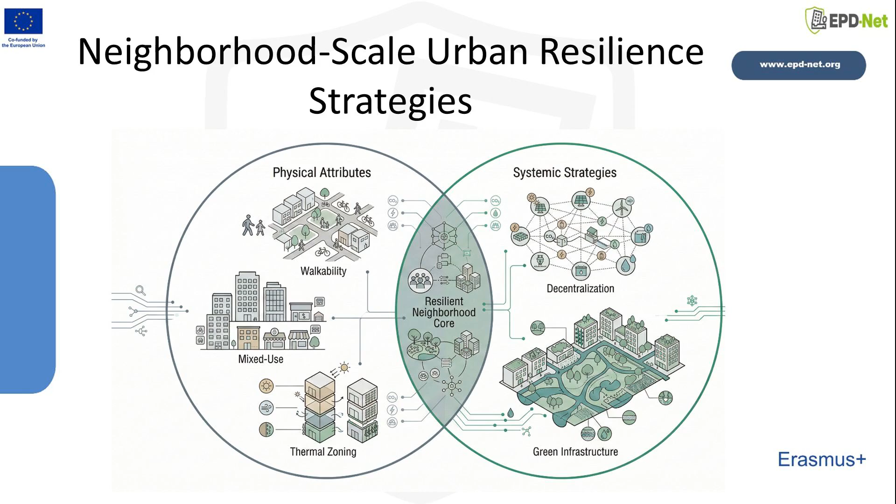Consequently, a multidimensional socio-technical framework is proposed. Within this framework, the integration of physical attributes, such as walkability, mixed use, and thermal zoning, with systemic strategies like decentralization and integrated green infrastructure is examined. The fundamental objective of this presentation is to outline how the neighborhood unit serves as the essential building block for fostering a resilient urban future through the synthesis of spatial morphology and social agency.

Urban resilience is built upon a multifaceted framework that begins with a robust theoretical understanding of the concept of resilience and the strategic mesoscale advantage of the neighborhood unit. By viewing neighborhoods as complex adaptive systems, practitioners can implement the principle of decentralization and optimize street network topology to ensure structural robustness. Within this spatial fabric, walkability serves as a primary resilience strategy and a critical survival mechanism, while the emergent neighborhood model and mixed-use development foster functional redundancy and social cohesion.

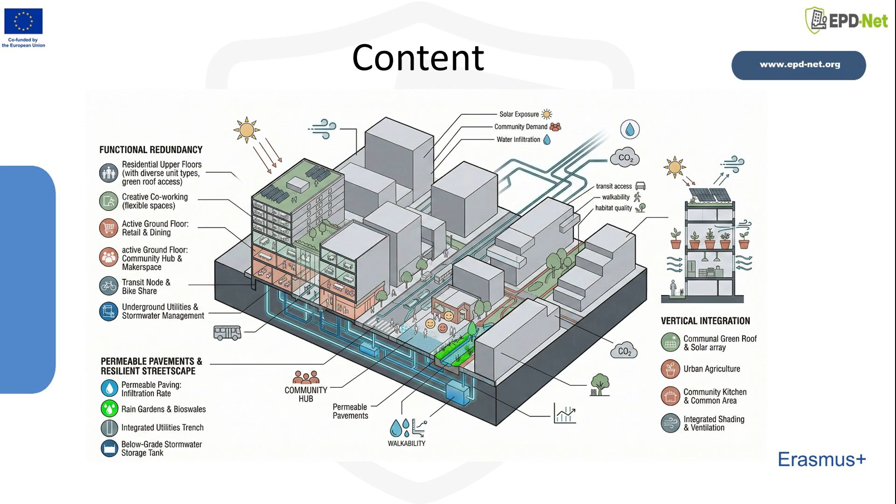Environmental stability is further enhanced through thermal zoning, climate sensitivity measures, and the pursuit of passive survivability. These physical attributes are integrated with nature-based solutions like integrated green infrastructure and technical systems such as decentralized energy production to create resource autonomy. Finally, this technical hardware is activated by the social hardware of community hubs and supported by transformational governance and tactical urbanism, leading to a comprehensive synthesis of actionable takeaways and conclusions for a resilient urban future.

For resilience to be effectively operationalized, it must be defined with academic precision. Within the seminal framework which poses the normative questions, resilience for whom, what, when, where, and why, it is recognized that resilience is not a value-neutral technical objective but is deeply rooted in political and social contexts. A system is not considered truly resilient if its physical robustness is achieved at the expense of social equity.

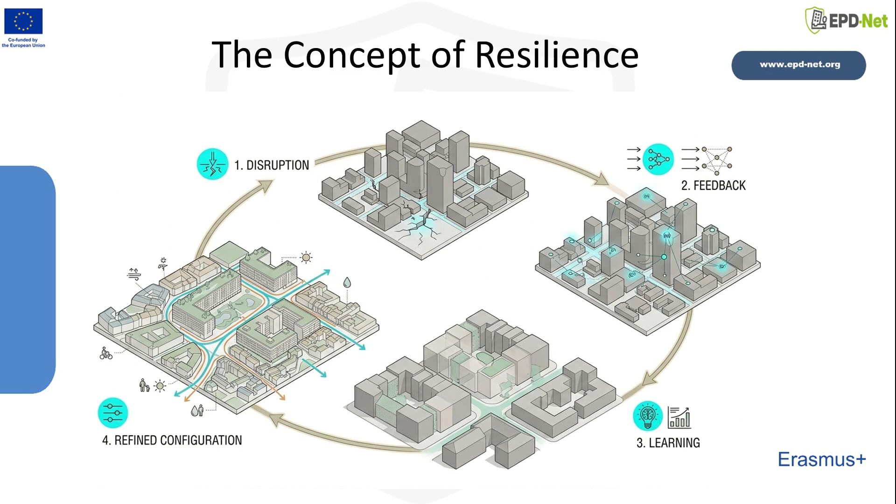Therefore, a balance must be struck between robustness, the physical durability of the built environment, and resourcefulness, the capacity of a community to mobilize assets under pressure. Resilience is viewed as an iterative process of constant learning, where every disruption serves as a feedback loop to refine subsequent urban configurations. The ultimate goal is the cultivation of a capacity to adapt and transform amidst pervasive uncertainty.

The neighborhood can be identified as the critical mesoscale of urban intervention. It is observed that macro-level citywide strategies often suffer from abstraction and fail to address localized microclimates or specific socio-economic requirements. Conversely, building-scale interventions are often too fragmented to ensure systemic stability. The neighborhood scale is identified as the optimal level for the integration of technical systems, such as microgrids or localized water management, while simultaneously fostering social cohesion.

At this scale, urban form, including parameters like building heights, street widths, and the distribution of open spaces, is seen to directly dictate the daily operational capacity and survival potential of the inhabitants. By decentralizing resilience strategies to the neighborhood level, a modular urban fabric is created, which is inherently more robust than a system reliant on a singular, centralized core.

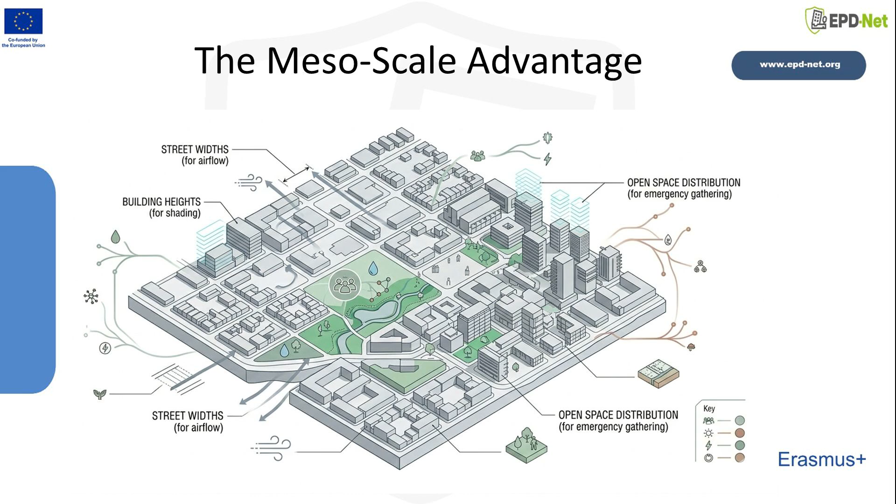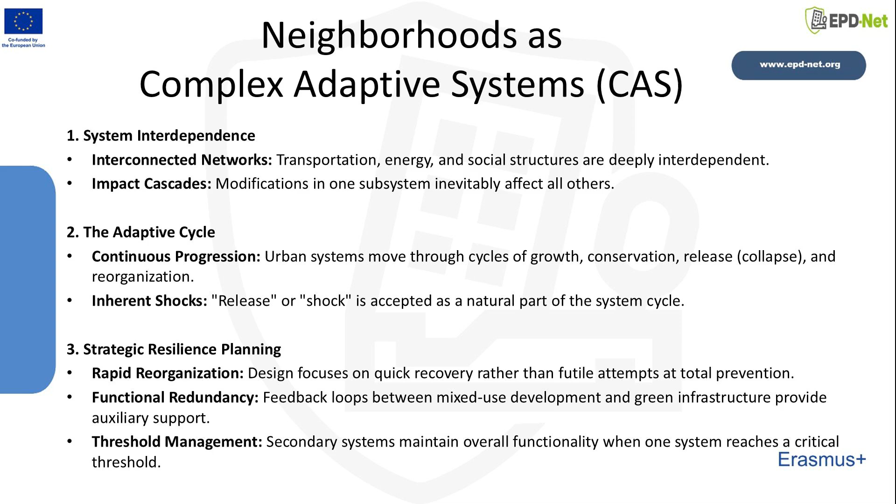Neighborhoods are conceptualized as complex adaptive systems, wherein transportation networks, energy grids, and social structures are deeply interdependent. It is understood that a modification in one subsystem inevitably impacts the others. Within this adaptive framework, urban systems are observed to progress through continuous cycles of growth, conservation, release, and reorganization. Resilience planning is based on the acceptance that release, or shock, is an inherent part of the system cycle. Instead of futile attempts at total prevention, neighborhoods are designed to facilitate rapid reorganization.

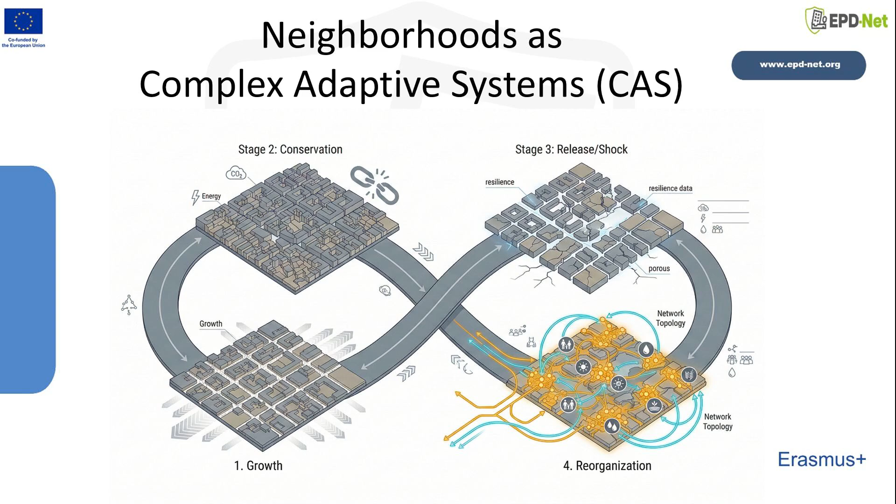By analyzing the feedback loops between mixed-use development and integrated green infrastructure, it is ensured that when one system reaches a critical threshold, auxiliary systems provide the necessary support to maintain overall functionality.

Centralization is identified as a primary vulnerability in modern urban configurations. Dependence on distant, singular power plants or massive water mains creates a high risk of cascading failures. Decentralization is advocated as a strategic defense mechanism.

By decomposing the urban environment into semi-autonomous neighborhood modules, the propagation of disruptions is effectively contained. The objective for a resilient neighborhood is the attainment of resource autonomy, achieved through decentralized energy production and localized water and waste management.

While the neighborhood remains connected to the macro city, it is equipped with islanding capacity, allowing for independent operation during macro grid failures. This modularity is a fundamental requirement for systemic robustness against contemporary environmental and technical threats. The street network is the structural backbone of the neighborhood.

The topology, or geometric arrangement of this network, is a primary determinant of its robustness. A comparison is made between highly connected grid networks and hierarchical, tree-like structures. The grid is characterized by inherent redundancy, providing multiple alternative paths if primary intersections are compromised. In contrast, hierarchical models are susceptible to isolation if a singular arterial road is blocked.

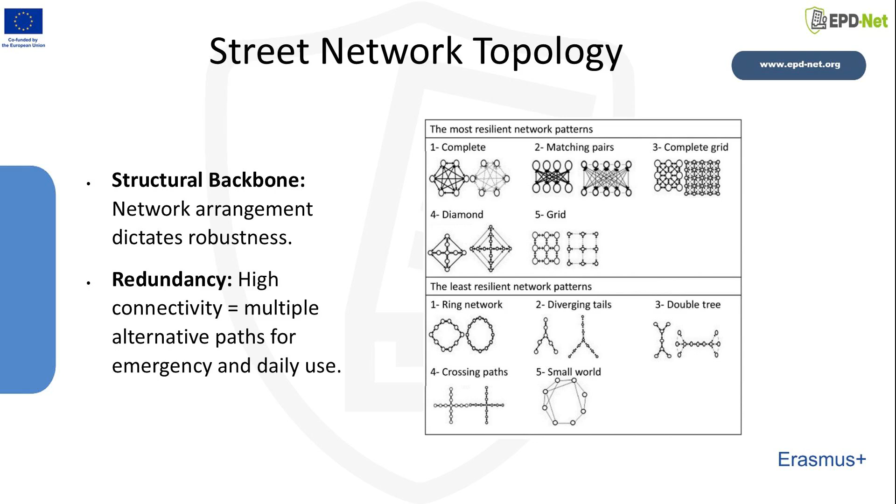By utilizing computational tools such as OSMnx, a Python library that allows users to download, model, analyze, and visualize street networks and other geospatial data from OpenStreetMap, these connectivity patterns are quantified. A resilient neighborhood must prioritize a porous, fine-grained street network, ensuring the continuous flow of residents and essential resources even when primary transportation routes are obstructed.

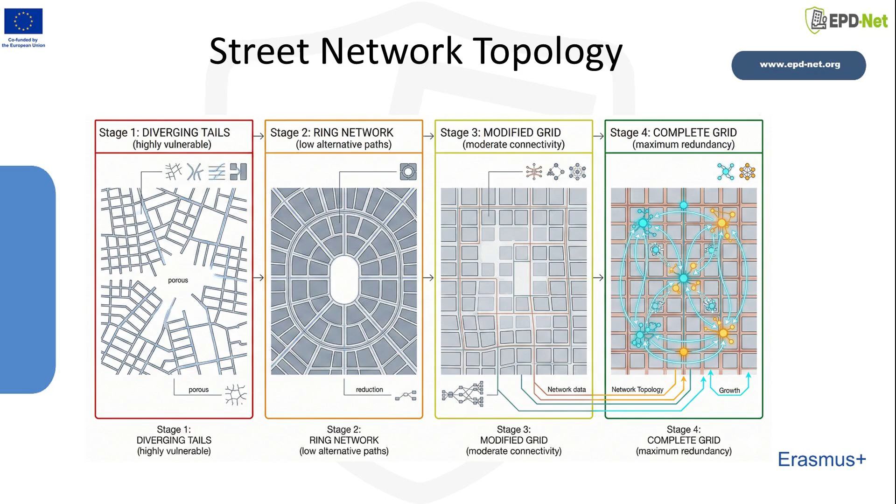Walkability is a primary redundant transport mode. In scenarios involving fuel shortages, cyber attacks on automated transit, or structural damage to road surfaces, the capacity for pedestrian movement determines the continuous accessibility of life-sustaining services.

Walkability is no longer a luxury but a fundamental necessity for the resilient city, providing a fail-safe mobility option when high-tech infrastructure collapses. A resilient neighborhood is one where essential resources and community hubs are situated within a 5 to 15-minute walking radius. This requires high intersection density and shaded, safe pedestrian corridors, a structural requirement that can be rigorously quantified through computational tools such as OSMnx to ensure a porous and fine-grained network topology.

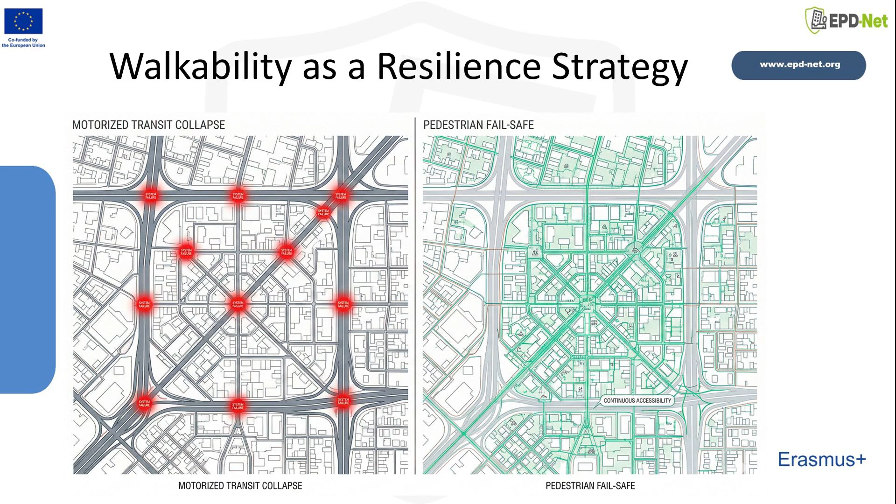Furthermore, the geometric configuration of walkable urban forms reduces the neighborhood's sensitivity to external transportation shocks. By decoupling survival needs from motorized transit through a robust pedestrian-oriented morphology, the neighborhood achieves a higher degree of self-sufficiency and functional continuity during the initial stages of a crisis.

The spatial formation of walkable networks is fundamentally defined through the emergent neighborhood model, described as a departure from static, administrative zoning toward a dynamic, living system approach. This model posits that neighborhoods are not merely administrative constructs but emerge from the underlying geometry of street networks.

When street networks are designed with high betweenness centrality, social and commercial centers are naturally fostered at the most connected nodes. This spontaneous order is regarded as more resilient than rigid, top-down master planning because it aligns physical form with actual human behavior and the human measure of urban life.

The model shares a lineage with the traditional neighborhood unit, particularly in the emphasis on pedestrian safety and the creation of sanctuary areas protected from heavy through traffic. However, where the historical model was criticized for being an isolated, inward-looking cell with clear boundaries, the emergent neighborhood model proposes a more permeable and overlapping structure.

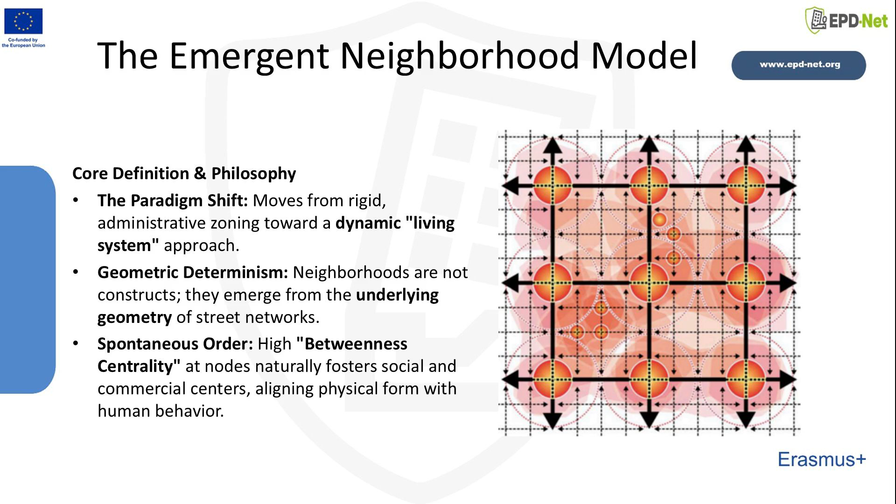Similarly, the model aligns with transit-oriented development, TOD, by prioritizing walkability and ecological community structures. However, the emergent neighborhood model seeks to evolve beyond the TOD paradigm, which can present health risks due to high-volume concentration. Instead of just maximizing density, it focuses on optimizing network capacity and territorial displacements.

It functions as a glocal entity, combining local place identity with access to the global world through mobility and digital infrastructures. It suggests that if the geometry and digital upgrading are correct, functional diversity and social capital will follow as a natural byproduct. Ultimately, by adhering to these geometric laws of connectivity and integrating micromobility solutions, a spatial order is created that reinforces the neighborhood's capacity for self-organization during disturbances.

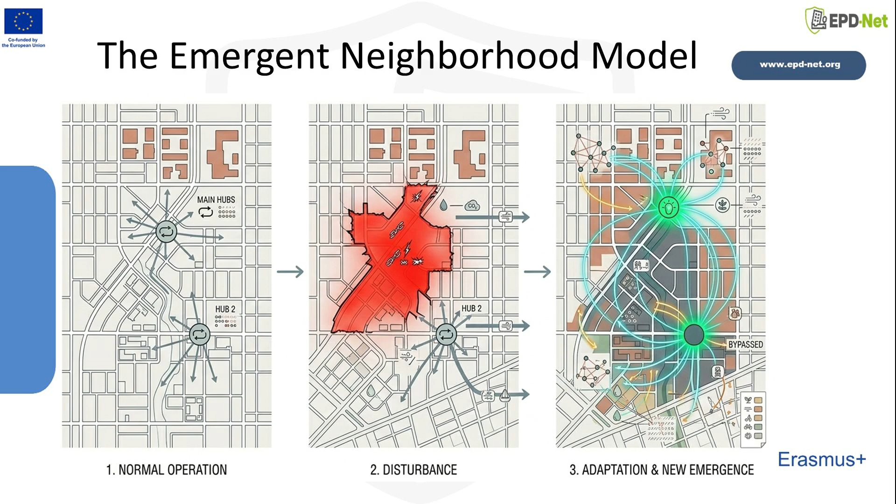Unlike rigid mid-20th century planning, this approach fosters a resilient urban fabric that can adapt to socio-economic shifts and unforeseen events. By incorporating zero-minute trips through digital accessibility and remote working flexibility, the neighborhood remains a dynamic, sustainable, and inclusive participant in the life of the city rather than a static artifact.

Mixed-use development is presented as the primary driver of functional diversity within the urban fabric. Purely residential zones are characterized as dormitories of vulnerability, lacking the localized resources necessary for crisis management. Conversely, mixed-use neighborhoods, integrating residential, commercial, and light industrial functions, possess functional redundancy. Local commercial spaces are identified as potential distribution points, and office environments are seen as adaptable for emergency use.

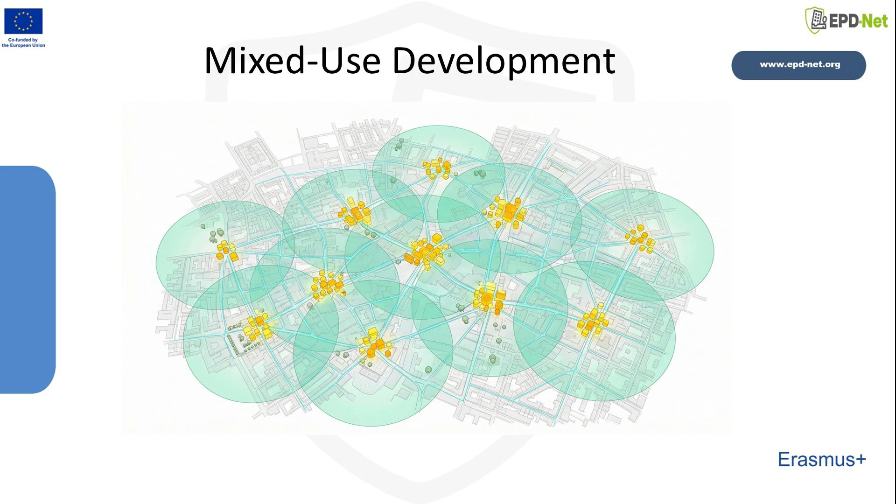This diversity ensures that the 15-minute city concept functions as a robust safety net. By localizing the economy and essential services, the circuity of movement is decreased, and the resourcefulness of the community is increased. The synergy between functional variety and spatial form is seen to significantly bolster the neighborhood's adaptive capacity.

The escalation of global temperatures necessitates that neighborhoods be designed to mitigate the urban heat island effect. This is addressed through the application of thermal zoning, which involves the strategic manipulation of urban morphology to influence the local microclimate. Through the variation of building heights to facilitate mutual shading, and the alignment of streets to serve as ventilation corridors, ambient temperatures are effectively lowered.

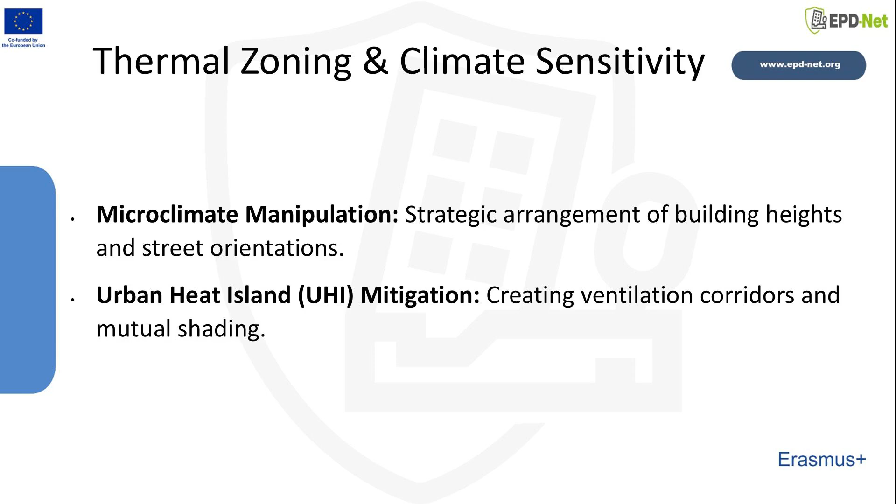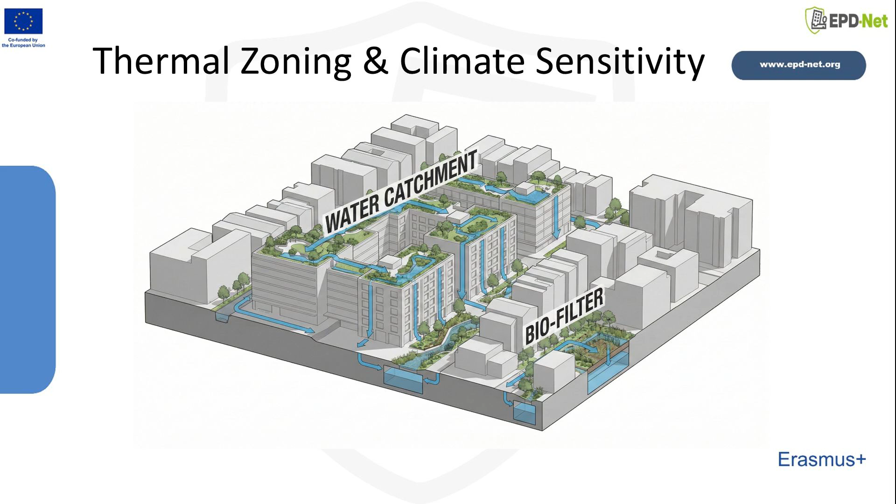It is defined as the capacity of the built environment to maintain habitable conditions, specifically safe internal temperatures and air quality, during extended disruptions to the electrical grid.

In a resilient neighborhood, reliance on mechanical air conditioning is minimized through the use of porous morphology. This involves the design of buildings and urban blocks that facilitate natural cross-ventilation and utilize thermal mass for temperature regulation. Fine-grained urban forms are often superior in this regard compared to massive, coarse-grained superblocks.

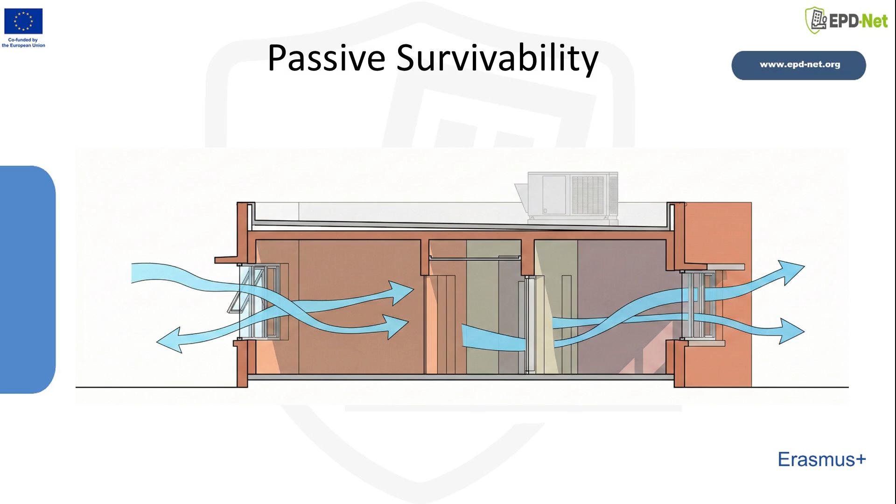Passive survivability is presented as a life-saving feature, particularly for vulnerable populations, ensuring that the neighborhood remains a safe environment even when active technical systems are incapacitated.

The green hardware of the neighborhood is explored through integrated green infrastructure. It is observed that traditional gray infrastructure is often characterized by brittle failure when its fixed capacity is exceeded. IGI, comprising bioswales, rain gardens, and permeable pavements, follows a safe-to-fail logic.

Stormwater is managed at the source through localized absorption, thereby reducing the hydraulic pressure on municipal sewers and mitigating flood risks.

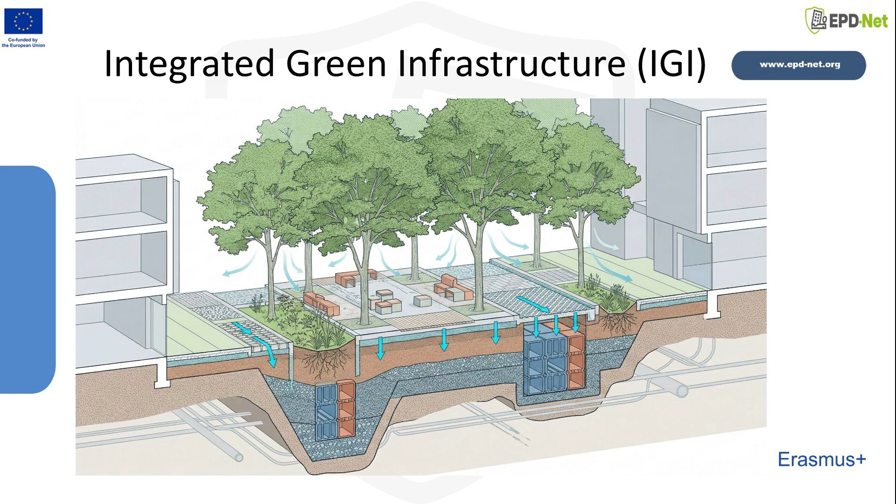Furthermore, IGI is seen to provide ecological redundancy by contributing to local cooling and air purification. By integrating these nature-based solutions into the existing street network, a sponge neighborhood is created, utilizing ecosystem services to buffer the community against environmental shocks and enhancing the overall microclimatic stability.

The traditional dependence of modern neighborhoods on a centralized electricity grid is increasingly identified as a significant systemic vulnerability, particularly in the face of climate-induced disruptions and infrastructure aging.

To mitigate these risks, decentralized energy systems, which incorporate neighborhood-scale renewable generation and localized storage, are proposed to transform the passive residential cluster into an active prosumer. By generating and managing their own power, these mesoscale units transition from being mere consumers to integral components of a distributed energy architecture. A primary technical advantage of this transition is the islanding capability of microgrids.

This capability allows a neighborhood to disconnect from the macrogrid to maintain critical local power during wider outages. In the event of a macrogrid failure, the neighborhood microgrid is capable of independent operation, ensuring the continued functionality of essential services, such as community hubs, water pumping stations, and medical facilities. Such resource autonomy, supported by neighborhood solar arrays, wind, and microgrids, is seen as critical for systemic robustness.

Beyond technical reliability, the transition encompasses vital social dimensions and promotes equity. Community-led energy cooperatives have been found to reduce energy poverty by democratizing access to low-cost renewables and fostering localized economic strength. By keeping energy expenditures within the community and creating local green jobs, these systems contribute to the long-term socio-economic resilience of the mesoscale.

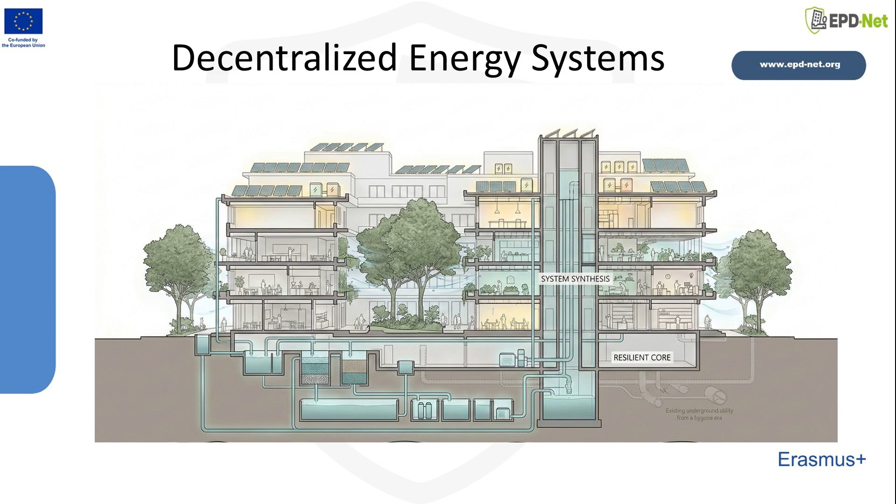This shift essentially redefines energy as a common good, where local governance of resources leads to a more sustainable, equitable, and disaster-resilient urban fabric. While technical infrastructure is essential, social capital is maintained as the primary driver of recovery. Community hubs, including urban amenities such as libraries, plazas, and schools, are conceptualized as the social hardware of resilience. These spaces are where bonding and bridging social networks are cultivated.

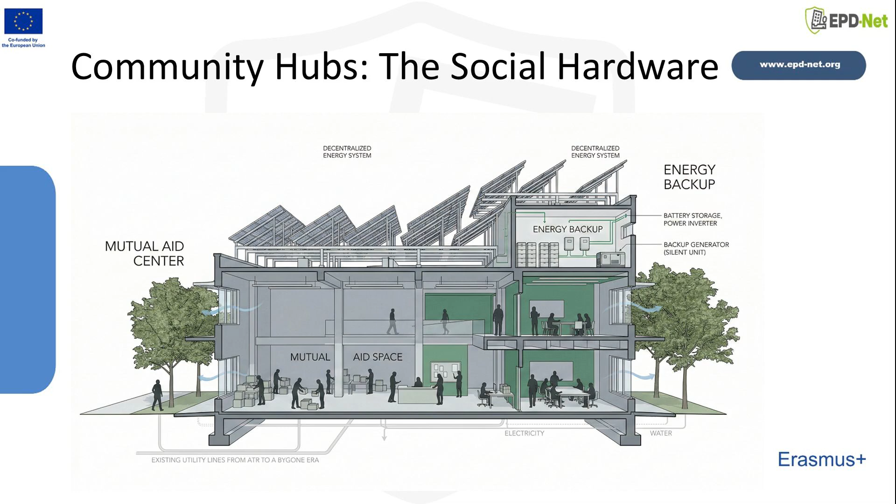During disturbances, these hubs are activated as centers for information exchange and mutual aid. Communities characterized by high levels of trust and social cohesion exhibit significantly faster recovery rates. The design of a resilient neighborhood must ensure these hubs are physically robust, equipped with decentralized energy backups, and situated at the most accessible, walkable nodes within the street network to ensure their utility for the entire population during crises.

The management of complex, decentralized urban systems is argued to require transformational governance. Traditional, top-down planning models are often too rigid for the dynamic nature of urban resilience. Instead, an adaptive, bottom-up approach is advocated, characterized by learning by doing. The utilization of situated knowledge, the localized expertise of residents, is emphasized to identify vulnerabilities that may be overlooked by macro-scale analysis.

Resilient governance is defined by its inclusivity, ensuring that residents are active participants in the management of their integrated green infrastructure and decentralized energy systems. By fostering collective ownership and agency, it is ensured that resilience strategies are both technically robust and socially sustainable, thereby strengthening the neighborhood's long-term adaptive capacity.

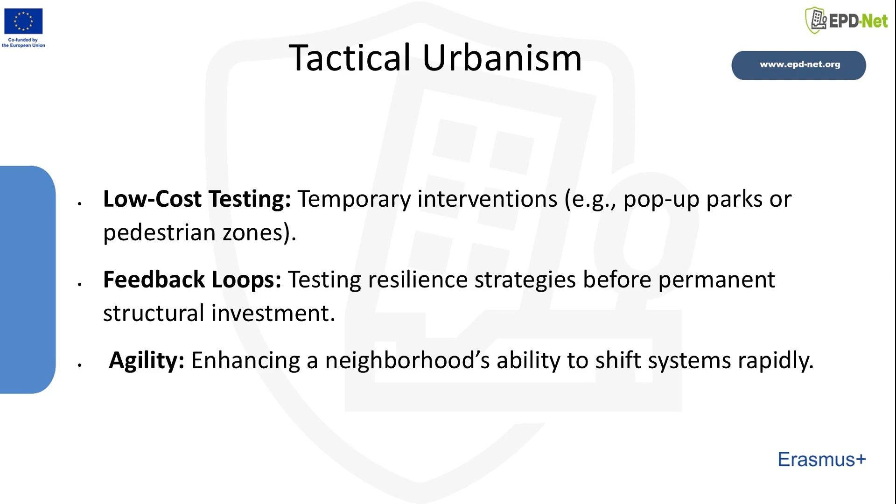Tactical urbanism is presented as a primary mechanism for the implementation of adaptive governance. These are defined as low-cost, temporary physical interventions, such as pop-up parks or temporary pedestrian zones, that facilitate the real-time testing of resilience strategies. By utilizing these methods, the performance of specific urban configurations, such as cooling corridors, can be measured before permanent structural investments are made.

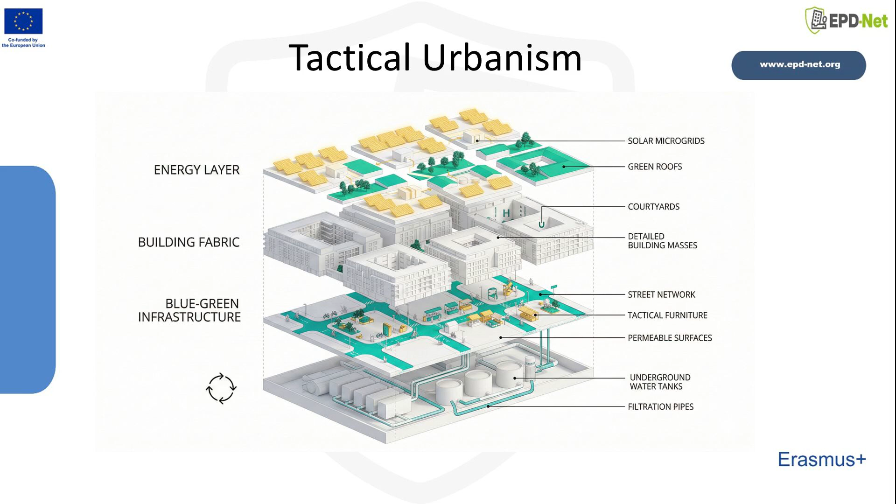This process creates a feedback loop that allows the neighborhood to evolve incrementally and adaptively. Tactical urbanism reduces the risk of costly, permanent errors and empowers the community to participate directly in the morphological evolution of their environment. This agility is identified as a necessary trait for any complex adaptive system seeking to maintain resilience.

The following synthesis serves as the comprehensive summary and actionable takeaways for the entire presentation, integrating structural strategies with socio-technical adaptive mechanisms. The transition toward urban resilience in the Anthropocene necessitates a shift from rigid resistance to a multidimensional, socio-technical framework centered at the neighborhood mesoscale.

By conceptualizing neighborhoods as complex adaptive systems, we can implement decentralization to achieve resource autonomy and islanding capacity, effectively decomposing the urban fabric into semi-autonomous modules that contain cascading failures. The structural robustness of these modules is dictated by their street network topology, where high connectivity grid patterns provide the necessary redundancy to maintain resource flow during disruptions.

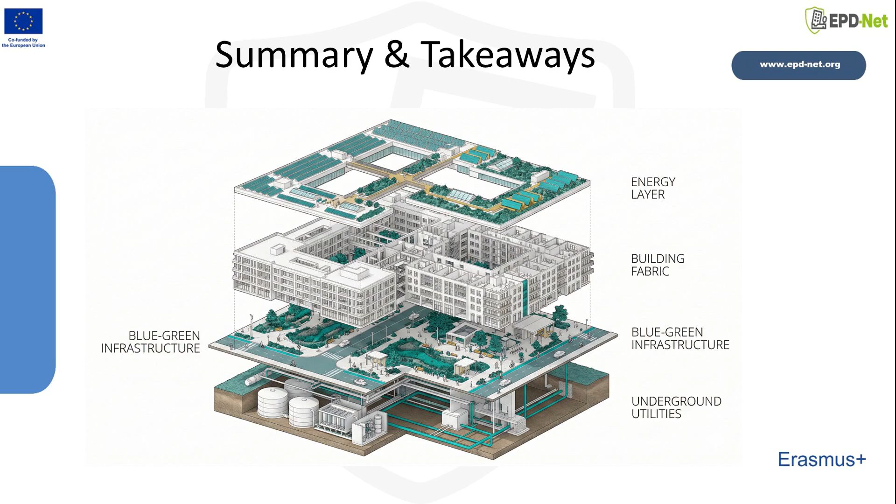This spatial order is best realized through the emergent neighborhood model, which leverages betweenness centrality to foster spontaneous social and commercial centers, moving away from the isolated cells of traditional planning toward a more permeable, living system. Within this fabric, walkability and mixed-use development function as primary survival mechanisms, ensuring functional redundancy and accessibility to life-sustaining services within a pedestrian radius when high-tech infrastructure fails.

Environmental stability is further reinforced through thermal zoning and passive survivability, which utilize urban morphology to maintain habitable conditions, and integrated green infrastructure, IGI, which adopts a safe-to-fail logic to manage meteorological shocks.

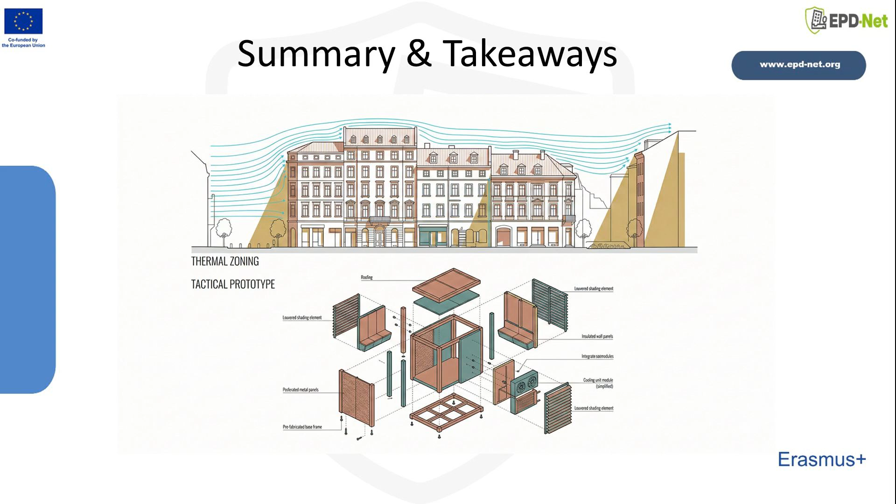Ultimately, this physical hardware is activated by the social software of community hubs and social capital, all governed through an adaptive, transformational approach that utilizes tactical urbanism as a feedback loop to refine subsequent urban configurations amidst pervasive uncertainty. In conclusion, urban resilience is conceptualized not as a fixed destination, but as an ongoing process of adaptation and transformation.

The neighborhood is reaffirmed as the most critical scale for urban survival in the 21st century. Through the integration of the physical hardware of street networks and decentralized energy with the social software of community hubs and inclusive governance, a truly resilient urban fabric is cultivated.

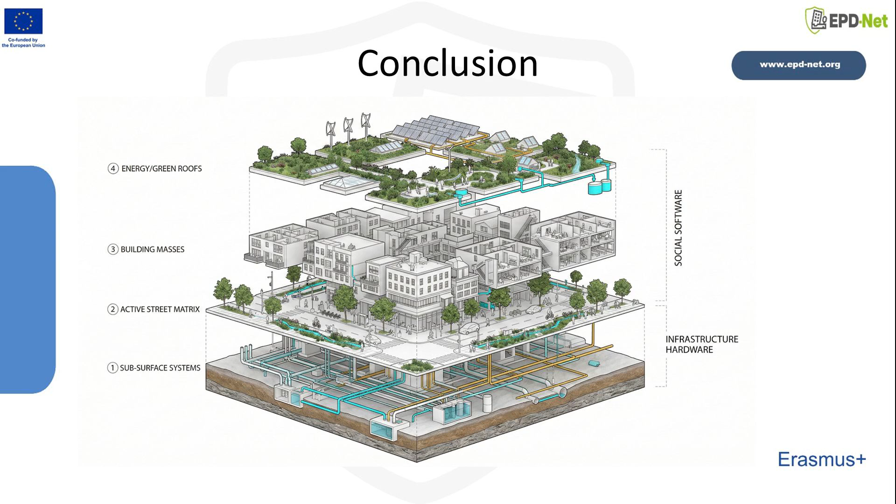It is advocated that practitioners move away from the rigidities of 20th century planning and embrace the modular, decentralized, and emergent qualities of the mesoscale. By empowering the neighborhood, a future is built that is capable of withstanding the shocks of the present and navigating the uncertainties of the future.